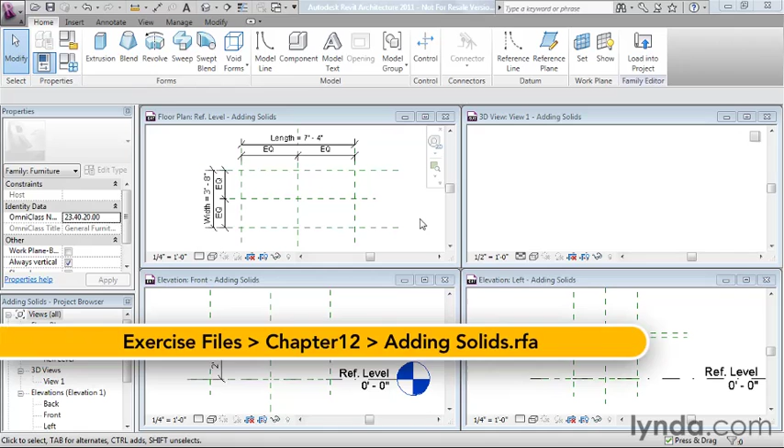As we continue the process of building a simple model family, let's direct our attention to adding solid geometry. I'm in a file called Adding Solids. We have a layout of reference planes and constraints and parameters that we created in the Reference Planes, Parameters, and Constraints movie. And I'm going to start my work here in the Plan view. And I'll go to the Home tab and create a solid extrusion. It's probably the simplest form of 3D solid that we can create.

Now Revit allows us to create both solid geometry, which represents actual physical solid things that we could touch, and then void geometry, which will cut away from the solid geometry to make more interesting or complicated forms. We'll look at void geometry in the next movie. Here I'm going to just change to a simple rectangle shape.

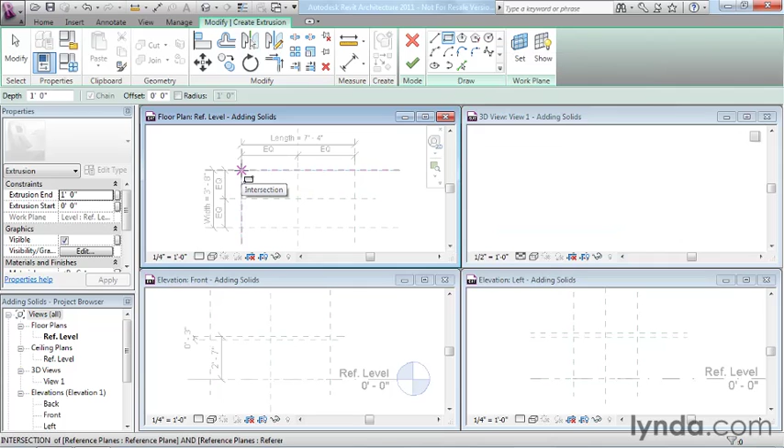And I'll go ahead and move my mouse over here, and you'll notice that it will automatically snap to the intersection between the two reference planes. So that's a pretty good thing. We'll go ahead and click there, and then we'll snap to these two reference planes and click here. And then Revit will offer to lock those relationships, which I will do by clicking each of the lock icons. This will keep the geometry constrained to those reference planes, and since the reference planes are so critical to forming the form and function of our family, that makes a lot of sense to go ahead and do that.

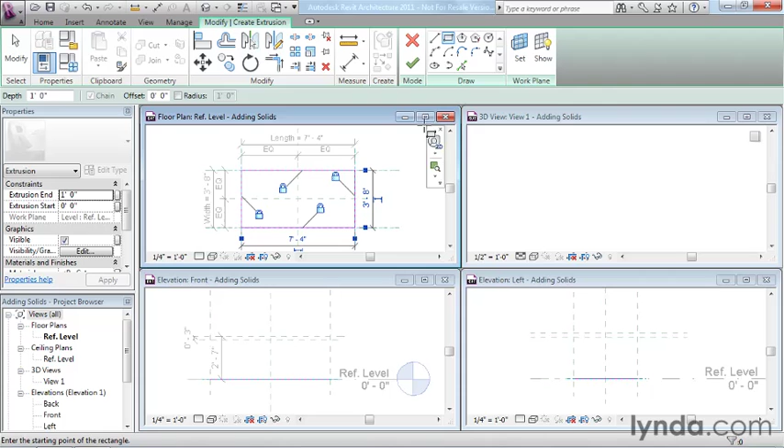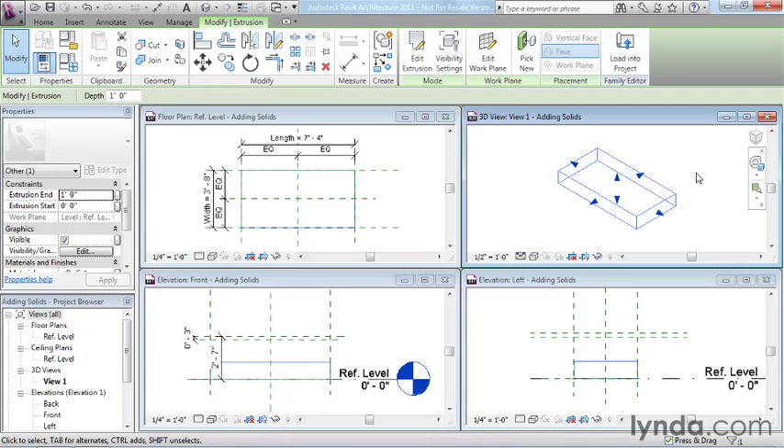I'm going to click Finish to create our simple form. And I'm going to click over here in the 3D view, and on my view cube, pick the little top corner right here. That will reset the 3D view so that I can actually see what we've created. And what you'll notice if you look at the 3D view and the two elevation views is that we've got this big slab of material sitting down on the floor. And the reason for that is the depth of the extrusion that we created was set to 1 foot. That was just the default.

Now, I'm going to come over here and click in the front view. I'm going to grab this top shape handle and drag it up and snap it to our top reference plane and then lock it. And then I'll grab the bottom shape handle, drag it to the bottom reference plane and lock that as well. And so that moves our slab of material up into the air.

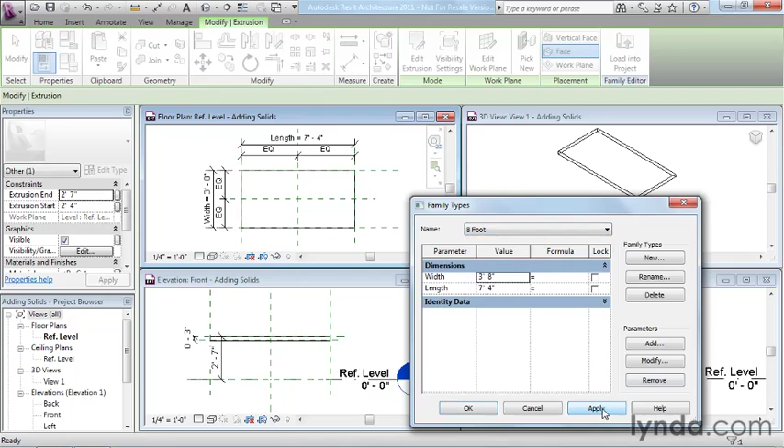And then I'll click back in the floor plan view, and it's a pretty good idea to go back to the ribbon and click the Family Types button and give this model a flex. So I'm going to try the 7-foot variation, click Apply. Everything seems to be working okay. Let's go back to 8 foot, click Apply, and then click OK. So every time you create something, it's a pretty good idea to go ahead and flex it and make sure everything's working the way that you expect.

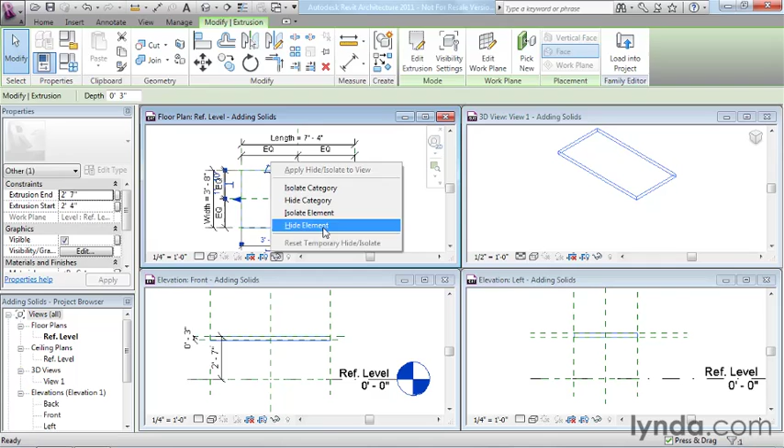Now the next thing I want to do is create a solid sweep. To facilitate that, I want to get this extrusion out of my way in the plan view. So I'm going to use the little sunglasses that we learned about in a previous movie. And I'm going to temporarily hide the extrusion element in plan only. Notice how it's still displaying in the other views.

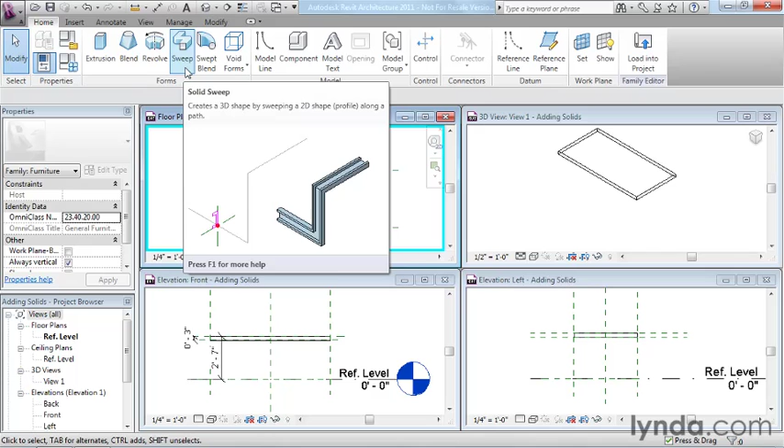The next solid form that I want to create then is a solid sweep. And you can find the button for it here on the Home tab. And a sweep, as you can see from the picture there, takes a profile, a two-dimensional profile, and it pushes it along a path. And that path can be 2D or 3D, as you can see there in the illustration. So I'm going to go ahead and click the sweep. And we're going to use a sweep to create the rail going all the way around our pool table. So the first step is to sketch the 2D path. So we're going to go ahead and do that.

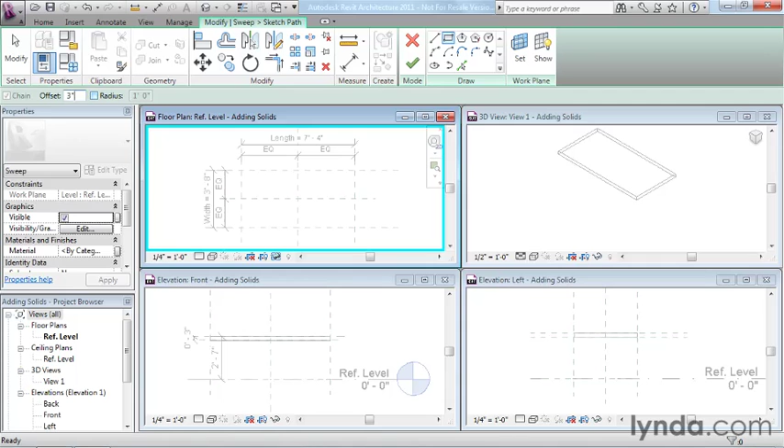And I'm going to start off with a simple rectangle, but before I start drawing the rectangle, I want to actually change the offset value right here to 3 inches. And the reason for that is I want the rectangle to be slightly larger all the way around than my slab that I already have. Now the reason I hid the slab was because I want to be sure that Revit is snapping to the reference planes. If the slab was still there, it would have actually snapped to the underlying slab. And it's much better to associate your geometry with the reference planes because they're what's driving the geometry.

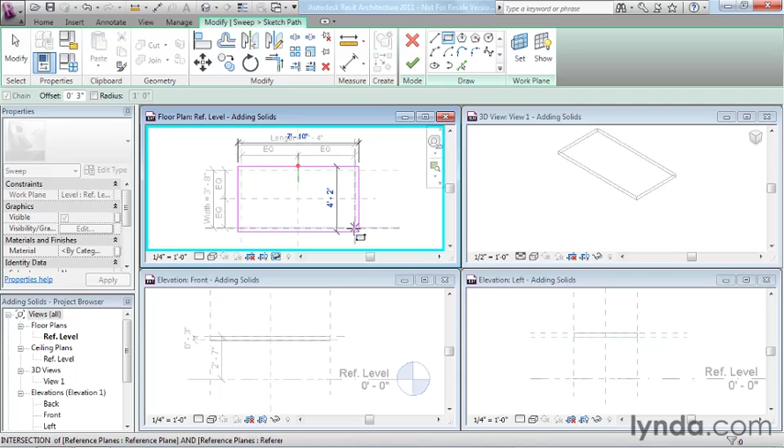So I'm going to go ahead and click there, start to drag. Now, if your shape is doing this, if it's on the inside, all you have to do is tap the space bar and that will flip it back to the outside. And I want to snap to the other reference planes over here. And then I'll go ahead and click Modify. Now I'm going to click the Line tool and let me zoom in so you can see where I'm clicking.

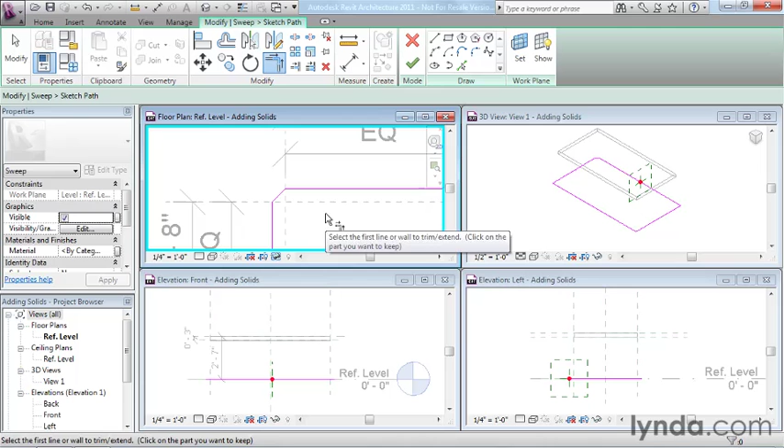Go to this intersection right here and then that intersection there and draw a short little 45-degree line. Click the Trim tool and trim that corner up like so. And now I'm going to repeat that process on each of the other 3 corners. That's the shape of my 2D path. As you can see, I have a nice chamfered corner now at all 4 corners.

Now, before I finish the path, I want to direct your attention over here to the 3D view. I'm going to click over on that title bar, and we'll notice that the path is actually drawing down on the ground plane, and I really don't want it to be down there. I could get away with it, but it actually makes more sense to me for it to be up at the height of the actual surface, the playing surface.

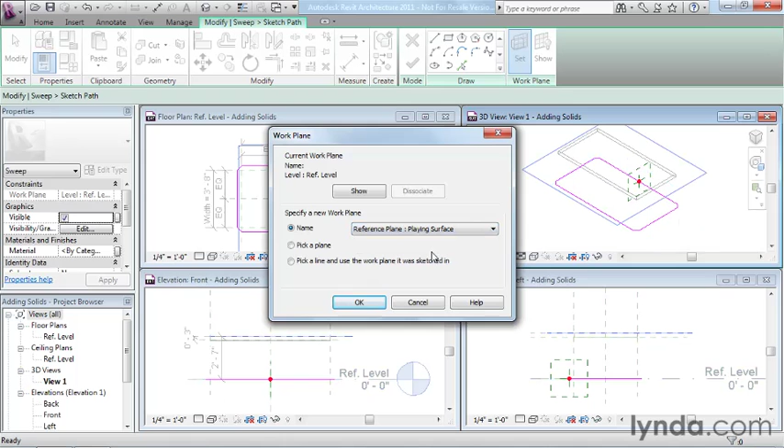Now, if you recall, in the reference planes movie, we actually named the reference plane for this purpose. So the way I'm going to take advantage of that is to use the Set Work Plane button. I'm going to click on that. The last time we saw this dialog is when we created an extrusion roof, and at that time we did pick a plane. This time I'm going to open the list, and you'll see that my named reference plane, playing surface, is available there. And when I choose that, you'll see that blue plane there jump up to the height of the playing surface. And when I click OK, you'll see the sketch line jump up there as well.

So now that I have the sketch at the right location, I'll go ahead and click the Finish mode here. And that completes the first step of the sweep. So we have the path now. Now direct your attention to this symbol right here. It's sort of like a cross symbol. You can see that in all 4 views.

I'm going to go to the left elevation view, which is looking right at that. And I'm going to zoom in on that area. And that's the plane that we're going to draw the profile on for our bumper rail that's going to sweep all the way around the pool table. Now we could draw the shape using the by sketch method right here. What I'm actually going to do is load a profile that I've previously drawn for you.

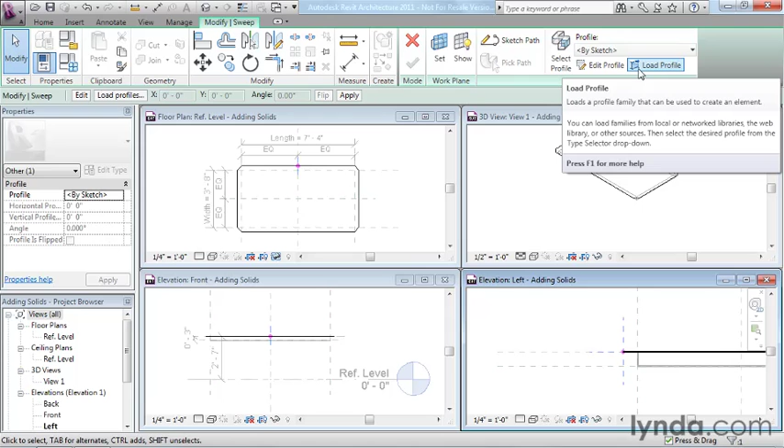So your 2 options when you're building a sweep are to sketch the shape manually, or you can go to the application menu, choose New Family, choose the Profile Template. That gives you a 2-dimensional family. You draw any 2D shape that you want to draw. Make sure it's a closed shape, save it, and then you can load that into other families to use as a sweep. I've already done that work for you.

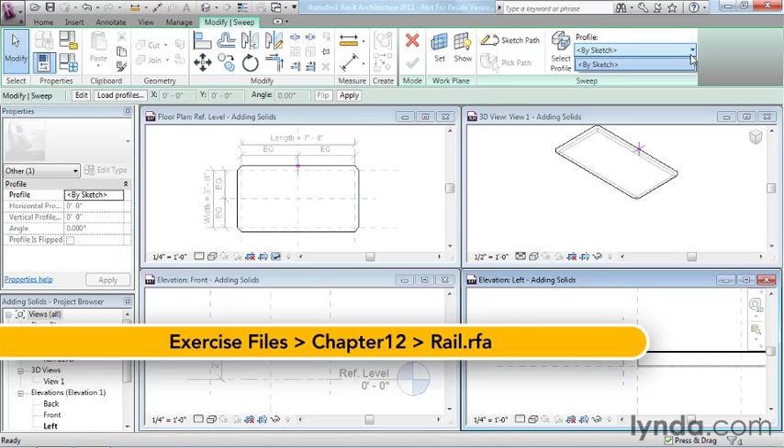So if we click on Load Profile, and go out to the Exercise Files, Chapter 12 folder, you'll find a rail family in that folder that we're going to use for this purpose. Go ahead and open that up. So now I've loaded the profile, but when I open the list, sometimes it doesn't appear right away. So usually you have to click the Select Profile button and then open the list, and that will force it to refresh the list and the rail will appear. So I'm going to choose Rail, and you'll see the shape appear in my elevation view.

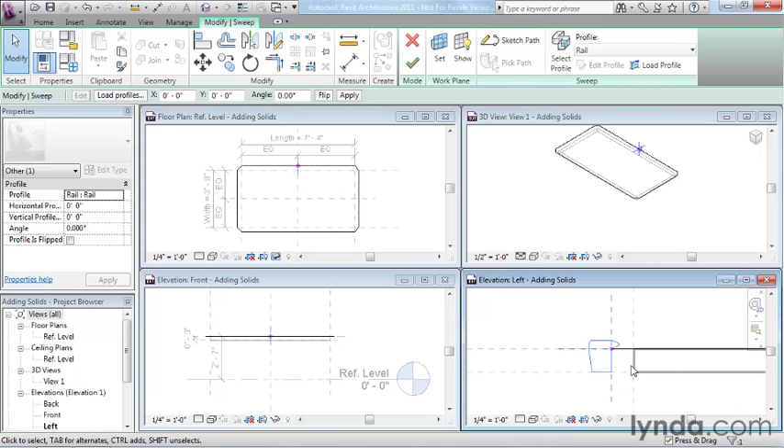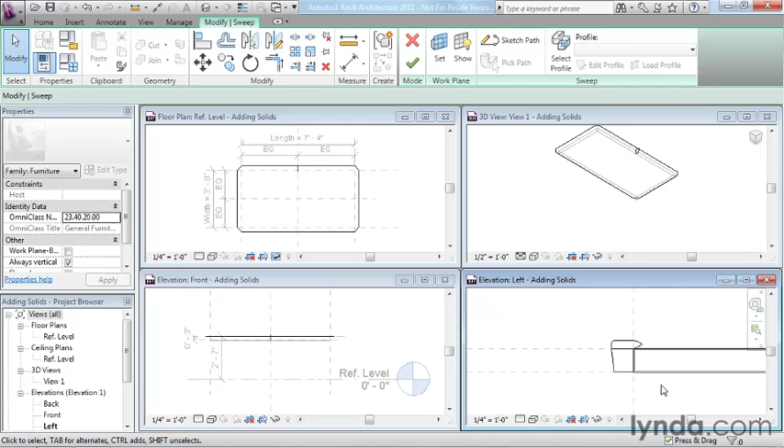And you can see that there's a little gap between the shape that I've drawn and the edge of the pool table slab. You could actually just move this. You can actually move it in any direction. I'm going to undo that. You can select on it and use the temporary dimensions if you know how far you want it to move. Or you can even use your familiar modify commands. Like in this case, I'll align to this reference plane, the reference plane that's built into the profile family. And that will snap it right over there. So any of those methods will do the trick. I now have the profile positioned in the correct location.

Incidentally, in your own profiles, if you draw one and it's not pointing the right way, on the options bar you have a flip button and you can actually mirror it around itself and flip it, or rotate it as well. So that will be helpful if you accidentally draw it the wrong way.

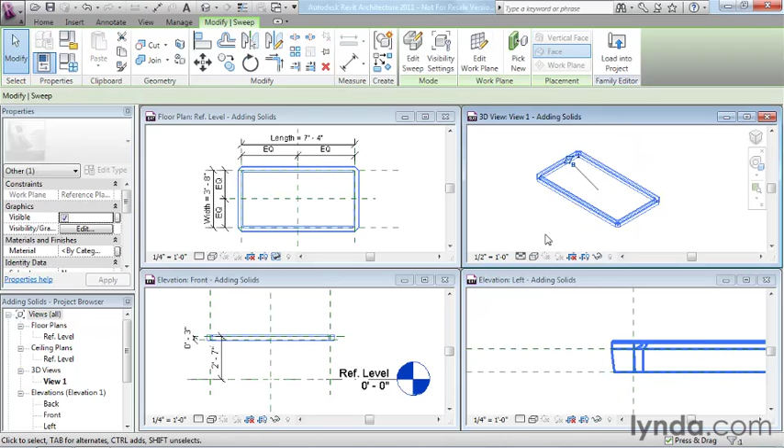So now all I have to do is click the Finish mode, and that will create the sweep. And the best way to look at that is going to be over here in 3D. Now the 3D view is currently in wireframe. So let's change that to Shaded with Edges. Zoom in just a touch and hold my shift down and drag my wheel, and you can see it's looking a lot more like a pool table every minute.